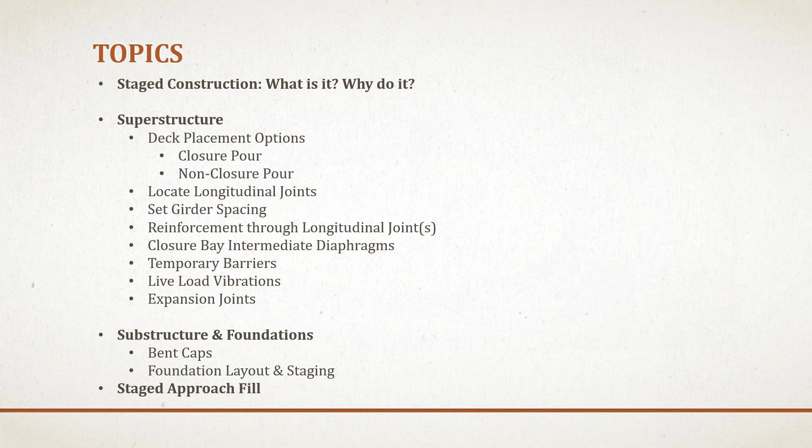Great, thank you, Aaron. Okay, so let's define stage construction first. The full width of the bridge will be constructed in stages or phases. There will be a portion of it that has traffic on it while the other portion is being built. And then ultimately these two come together to form the whole and the finished product.

The stage construction gets utilized in basically three different conditions. The most predominant conditions are when you're replacing a bridge that's already in service, when you're widening a bridge that's in service, and then occasionally you've got a special condition where it's beneficial to do stage construction in a new location. Aaron will touch on that a little bit more as a special topic, in addition to just right-of-way and easement and utility concerns that can also get in the way.

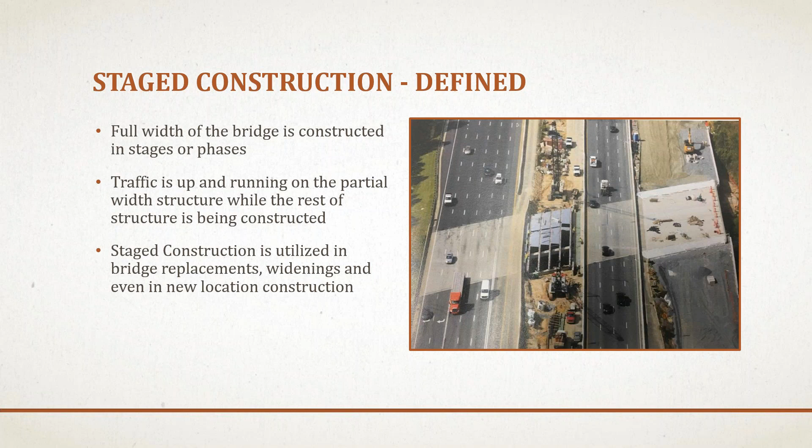All right, so why would you want to use stage construction when you're looking at a bridge replacement? You've already got active traffic in the area where you're needing to do the bridge replacement, and so it may not be practical or feasible to just take people completely off of the bridge that's there, to temporarily or permanently realign the roadway, or just do a total off-site detour. There's impacts with that. You've got to consider maybe having to buy some right-of-way, environmental problems, increase in cost from temporary bridges and approach roadway that comes into it. And some roads, you just can't shut them down. They're too busy. The traffic volumes are too high. There's just no way you could effectively maintain reasonable traffic conditions and shut down that road.

For example, interstates, bridges, roads that are on the national highway system, regional tier classification routes. And sometimes there'll be maybe just a smaller structure that needs to be replaced. You have to do something in a stage constructed way because you don't want to completely cut people off. You can't impact access to schools and hospitals or give somebody an unreasonably long detour. So these are things that are very important to the DOT, and we always take that into consideration early in the planning process for deciding how bridges are going to be replaced.

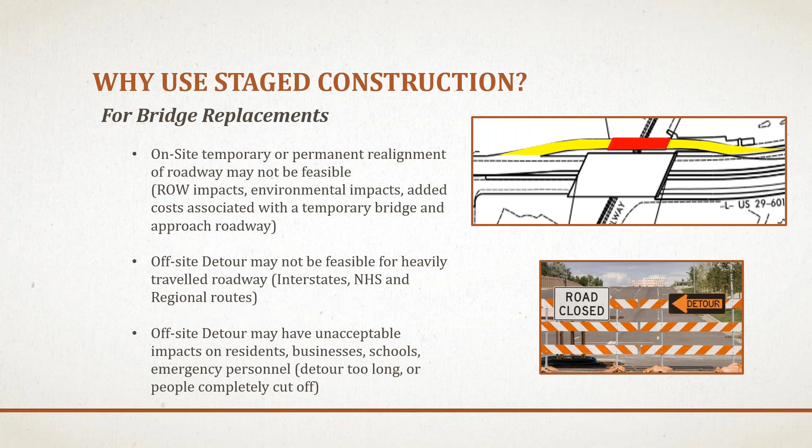Widenings are great in that you're most often able to maintain traffic on the bridge while you remove a small portion of it and then continue to build onto it. So you can typically avoid any kind of detour conditions with a widening. So those bridge replacements and bridge widenings would be reasons for using stage construction.

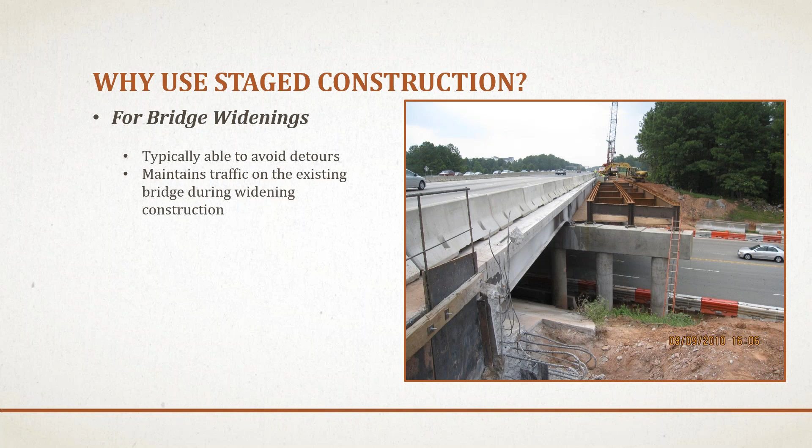Another case I wanted to talk about briefly wouldn't fit into the criteria Josh just covered, where we're trying to either detour or maintain traffic on site. This could potentially be on a new location, say like a Raleigh or Charlotte outer loop, where we don't even have any traffic. But when we have very wide structures, and by very wide I would define that as anything over 120 feet along the skew of the bridge, that can create problems. And the 120-foot dimension is derived from the maximum width that a typical bidwell screed can span without significant truss modifications.

So once we get over 120 foot, we need to be looking at other alternatives. That could be stage construction, where we basically build half, then build the other side, and then close the middle with the closure pour.

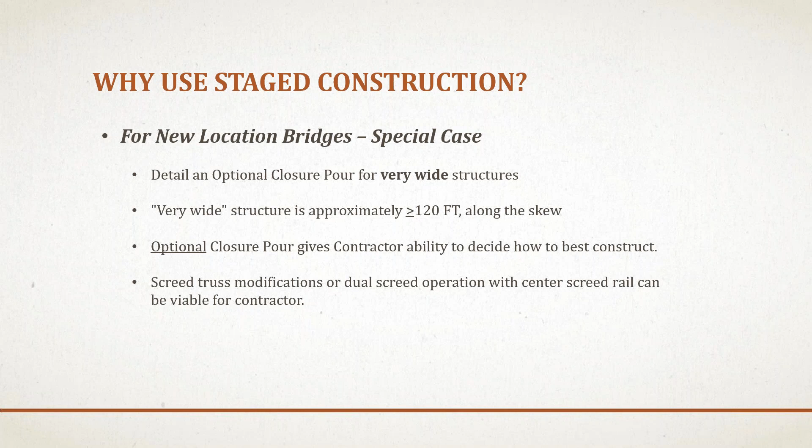So that's one option. But I've had a couple bridges where the contractor has actually utilized two screeds with a screed rail down the middle. So they've got their typical screed rails on the outside, and then they put a third screed rail down the middle. You can see the two trusses, the screeds that are staggered slightly, and they basically poured the bridge using those two screeds at the same time.

They utilized two separate pumps, so it was almost like two separate concrete pours going on at once. By doing this, they did not have to stage construct. So that was a good innovative way to expedite the project and avoid having the stage construction.

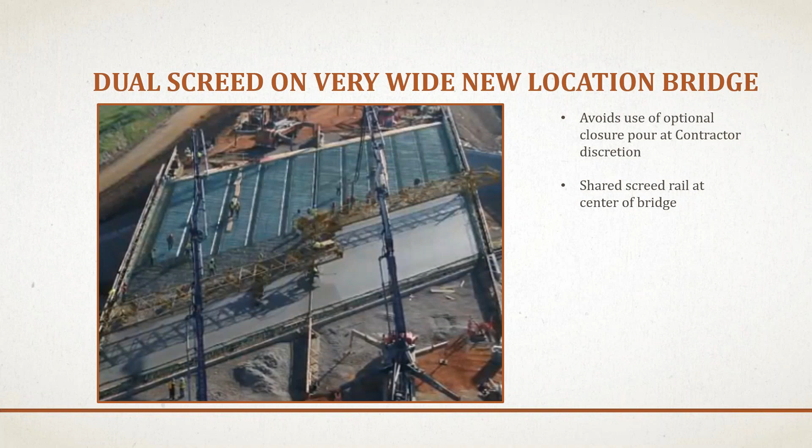The first time I dealt with this, the contractor just proposed it. The second time I knew it to be done, so during design, we decided to show a closure pour on the plans and stage construction, but give the option of the contractor to do it. That way they had the option to do it in two stages or do something similar to what this contractor did. This was a very successful pour. I think they poured about 750 cubic yards of concrete in that one pour. So it was pretty innovative and worked well to avoid stage construction.

Okay, so now with that groundwork on what it is and why we would do it, let's take a look at some of the details of the implementation as far as the superstructure is concerned. I'm going to switch my mouse mode here to show a laser pointer.

Okay, so we're going to be defining a closure pour on this slide, and here in the upper left-hand corner is an existing two-lane bridge, and on the bottom shows the full width of the future structure, the one that we're going to be constructing. So we're going from 2 lanes to about 5. Obviously there's a lot of traffic here to justify that large of a structure, and that explains, in part, why we would need to do stage construction here.

So you start out by building one half of the bridge, designated stage 1, while traffic is maintained on the existing structure. Once this was completed and has a portable concrete barrier rail erected here to make that a safe edge for both the public and for the people working on the other side of it, you move your traffic over into that portion of the bridge. Then you come and build the remainder of the new structure.

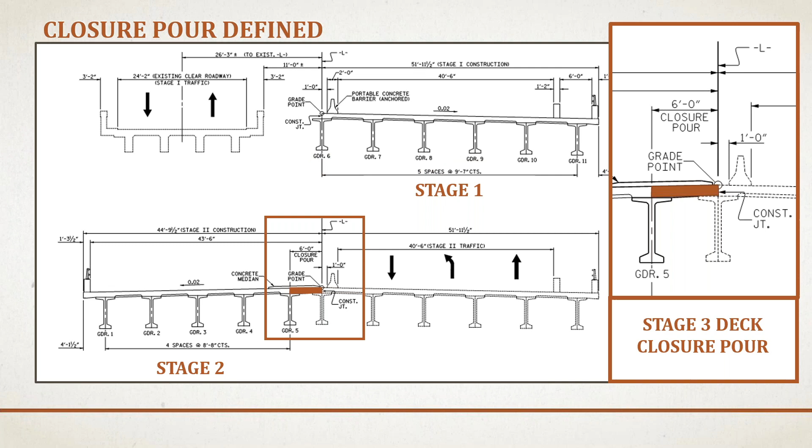And then what we're really honing in on here in this presentation is what are we doing when it comes time to connect those two with the stage 3 deck closure pour right in this area. So that is where you build one half, move traffic to it, build the other half, then connect the two, and then you're ready to open the bridge to final service. So that's kind of the definition of a closure pour, this little closure area that connects the two structures that have been constructed partially. Then we have an alternative condition.

This is a real creative name here. This is called a non-closure pour, and it's an alternative to using a closure pour. It's applicable under some more constrained conditions, which we'll discuss. But usually that means you have a narrower structure with spans that aren't quite as long that permit this type of construction, where you would come and add directly onto an existing bridge or an existing portion of a newly constructed bridge in order to span it out the rest of the way.

There's criteria that allow you to use this condition. It's an alternative that's open to you, but the closure pour you're always welcome to use. Sometimes a set of plans will have closure pour details, and the contractor will come back and say, I think I could do this with a non-closure pour approach, and it would be beneficial for them. So we'll review that and make any modifications that are needed to facilitate that.

In a case like this where you're using this on a widening, which is kind of a typical condition where this would occur, is what we're showing in this diagram. You would often use a latex modified concrete overlay to help improve the rideability as you go across this joint that gets created.

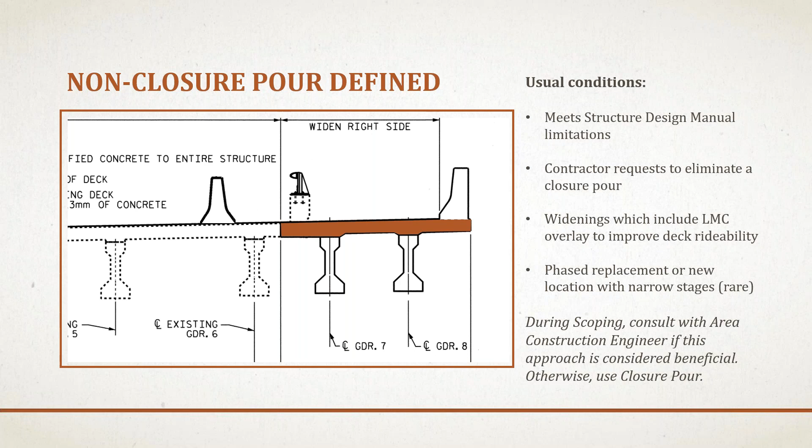Okay, so a couple more minutes for me here. The method of making a selection on the closure pour or the non-closure pour.

The non-closure pour is limited, and you cannot use it on steel structures at all, just due to their inherent increased flexibility. And then with pre-stressed concrete girder superstructures, there's some limitations on the span length. All spans in the bridge have to be less than 85 feet, and all spans have a non-composite deflection limit of 1/2 inch. If you meet those criteria, then this is a candidate approach that you would want to consult with the area construction engineer to see if they feel that would be beneficial for this particular bridge design. Otherwise, you use a closure pour.

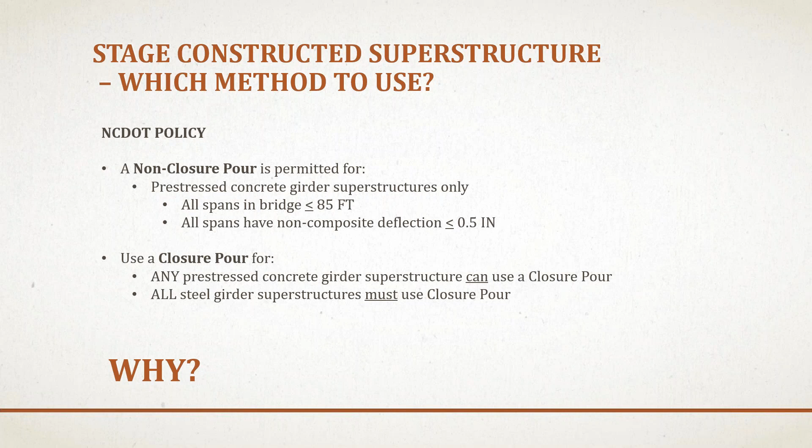And so the question is, well, what's the difference between those two? What are some driving concerns behind the deflection and the span limits? It has to do with both deflections and the time that it takes in order to get concrete cast.

This diagram is showing the incremental increase in dead load deflection as the concrete pour progresses from back station bearing to the head station bearing on a presumed simple span structure here. When you've got 1/4 of the span placed at the quarter point of that span, you will see 17% of the deflection that will ultimately occur when the span is completely poured. Following that through, when the span's halfway poured, you get to 54%. 3/4 poured, you're at 87%. And when you're finally done with the pour is when every point in the bridge has reached its final deflection amount that it's going to be experiencing under the dead load application.

And so the timing of this is an important consideration, and you can also run into a condition that is known as wedging, and I'll let Aaron talk to that one. Put it back on that last slide.

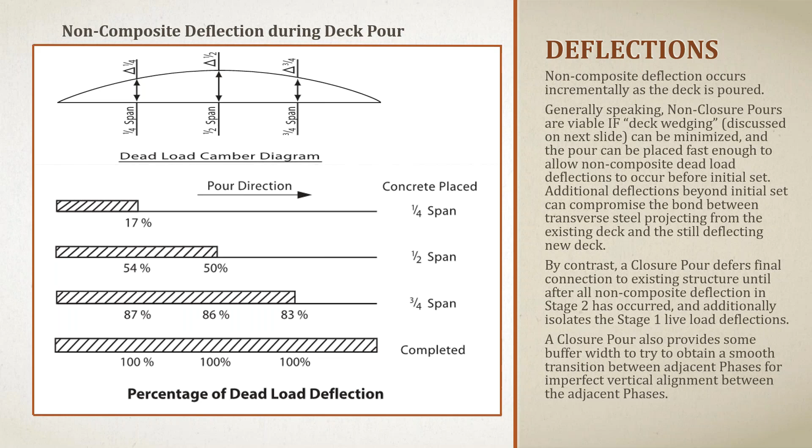If you are in that range of a half inch, or if the contractor proposed to eliminate a closure pour and it slightly exceeded what was in the design manual and it was agreed upon to allow it, a couple things you could do is preload the span to try to get some of that deflection out before we screed it.

Typically, we like to keep the leading edge of the concrete about 5 to 10 feet ahead of our screed. But in this case, preloading it out onto the span, maybe halfway or 3/4 of the span, gets most of that deflection out before you start screeding.

Now there's obviously a risk because you have a whole lot of concrete out there — if the screed breaks down, or something happens, or you get rain, you're left with a whole bunch of concrete that hasn't been finished, and it could be very costly to deal with from a contractor's perspective. But under certain circumstances, if agreed upon by the engineer with the DOT, we have done this.

One thing I like to do if I was going to preload would be to keep the concrete below the top mat of reinforcing steel — there's 2 mats on our decks. Then they can preload and come back and place fresh concrete in front of the screed, vibrate the two to make sure we don't have any cold joints, and continue to go back and forth and advance the screed. That would mitigate some of those effects that I described.

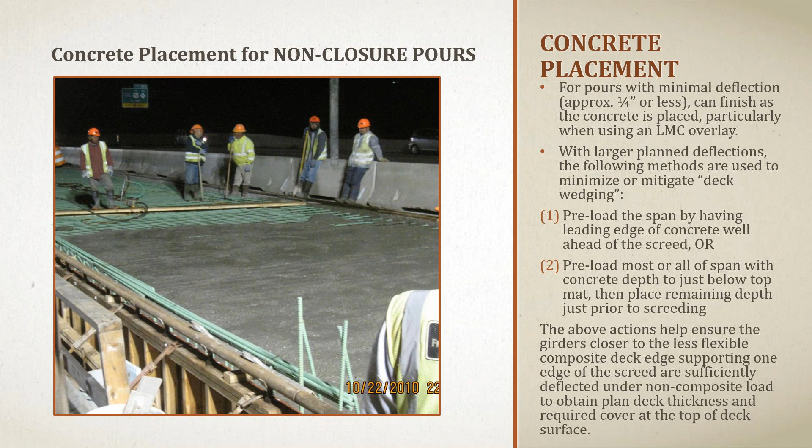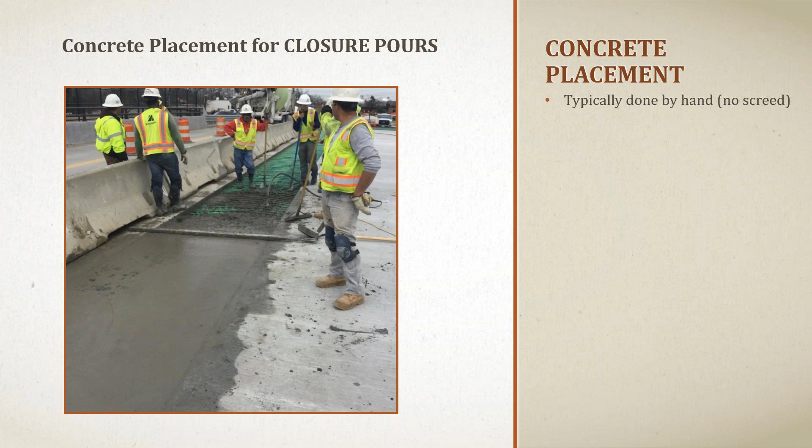It's closing that gap. They can range in width, and typically it's small enough that the contractor will just use some form of a straight edge to finish that concrete. If it gets too small of a closure pour, you can have issues with your left or right side possibly not matching up as well, resulting in a more severe slope between. If it gets too far, the finish in between the two might not be as good. So these are considerations to think about when deciding how wide that closure pour is going to be.

But the point I want to make is that when you design the stages of construction based on that pour sequence, when you come to pour the closure pour, your deflection has already happened in your deck. If there's any deflection at all, it's very minimal when pouring the closure pour, so it does not have to be divided up with transverse construction joints. I've seen plans that divided up closure pours to match those transverse joints, but that is not required because of the lack of deflection.

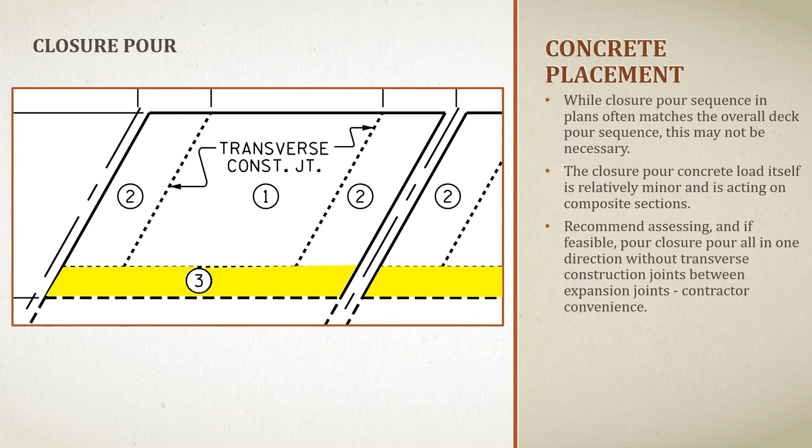I'm going to get a little bit into deck forming, particularly in the closure pour region. If there's one thing I learned while putting this presentation together, it's that there are lots of different ways to do this. Different contractors or engineering firms have different preferences, and based on the situation, have different alternatives. So there's no one-size-fits-all method. I'll just go through a few of these.

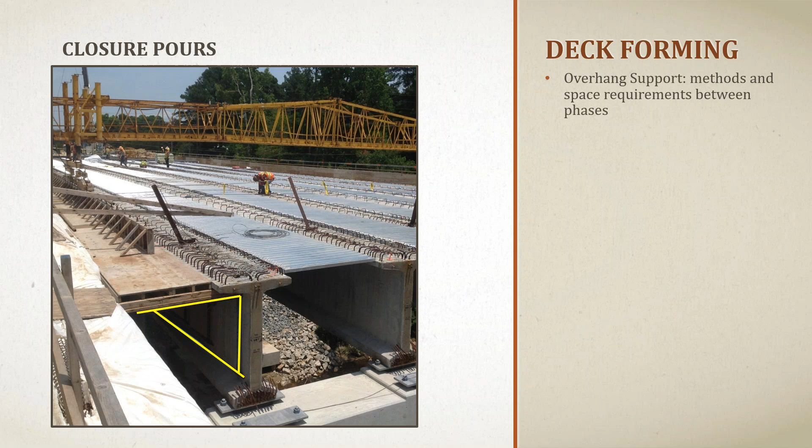The important thing, and I mentioned it before, is that whenever you pour that second stage, it has to act completely independent of stage 1. We don't want anything tied together that would limit the deflection when they go to pour stage 2 - we want it to deflect like it was designed to.

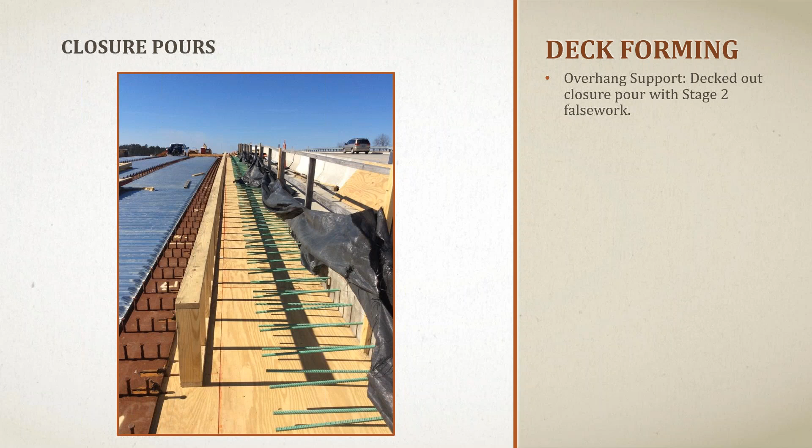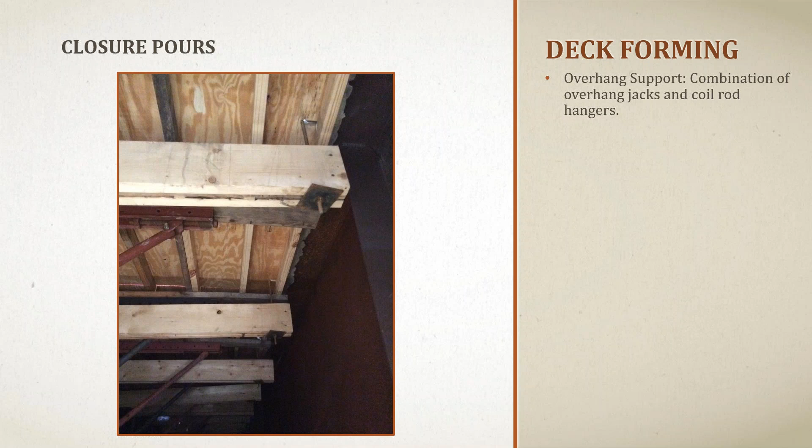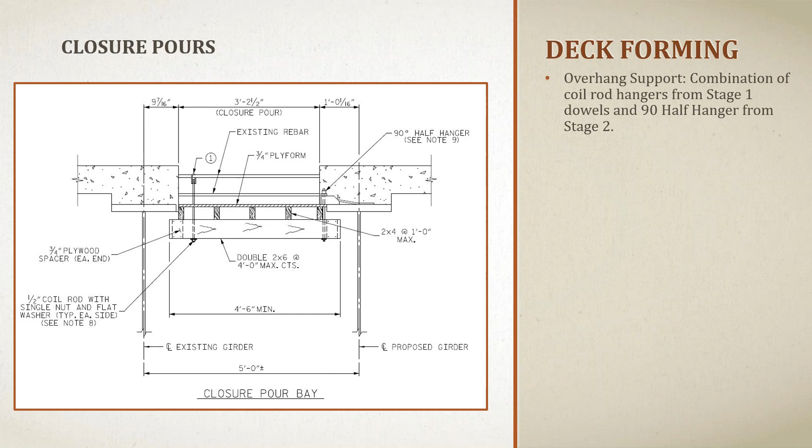Here's another diagram where they did not use overhang jacks. On the left side is stage 1, and you can see they've got a coil rod and hanger coming off of the reinforcing steel from stage 1. Then on the right, when doing stage 2, they've got that 90-degree half hanger supporting the false work to floor in that closure pour. As they pour stage 2, it can rotate and pivot and deflect, and once they finish, they can pour their closure pour.

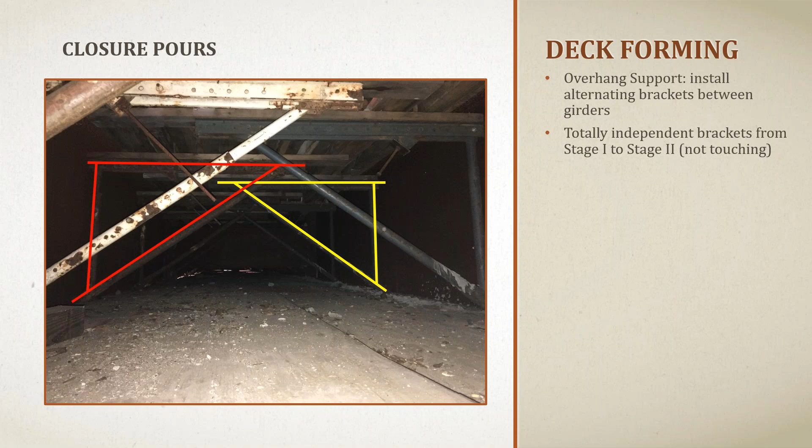This particular contractor chose to use all overhang jacks. Although it's hard to really see what's going on, they poured stage 1, used the overhang jacks to support their false work, then set the girders on stage 2, put new overhang jacks on that side, overlapped them, and floored in over top of them. So they were able to act independently of each other, but that's the methodology they chose in this case.

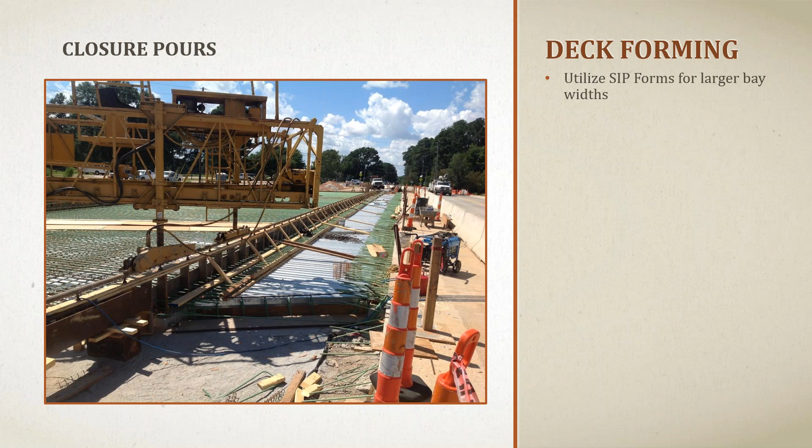As a designer, you'd have to recognize that if you're calling for that construction joint to be over top of the girder, you have to modify the stirrups coming out of the top of the girder, which is standard and it's not a problem. You just have to recognize that so they don't cast the girder with the connected stirrup.

I'm going to let Josh talk a little bit about longitudinal joint placements. So for longitudinal joints, there are some best practices in play, recommendations that we observe depending on the structure type. For pre-stressed girders, you will typically locate your longitudinal joint just off of the edge of the flange.

We're discussing here a way that you can put it right down the middle, and that's acceptable too. But usually you want to have it at least 3 inches offset from the edge of the flange in order to accommodate room for the hardware that the contractor will utilize to create the forming that's needed.

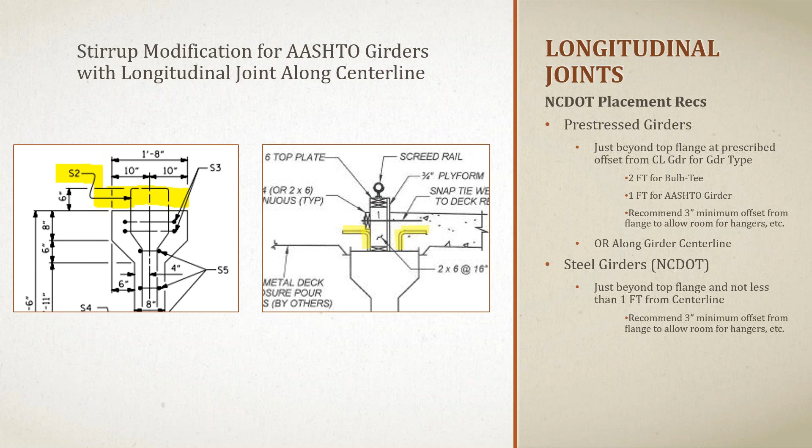Okay, so some additional placement recommendations for longitudinal joints. You try to place them where they're not going to be getting beat by traffic. Put them in a shoulder if possible, below a median if possible.

Additionally, you want to place them on a crown point, where bridge decks are super elevated for drainage purposes and for horizontally curved structures. The super elevation is also a very important safety consideration for handling curves.

But you want to either put your crown point on that joint, or have your joint at least 4 feet away from the crown point, again, for good implementation of the screed operations in the field.

And the reason that 4 feet is that we need 4 feet or more when we're screeding a bridge. The screed can only come within a couple feet of the side form, and from that point to the outside, you've got somebody hand finishing that area.

And so if hand finishers have a tough enough time just projecting that 2 foot straight based on the super elevation, if we asked somebody trying to hand finish a crown break and get that consistent, it would not go well. We would not get good results.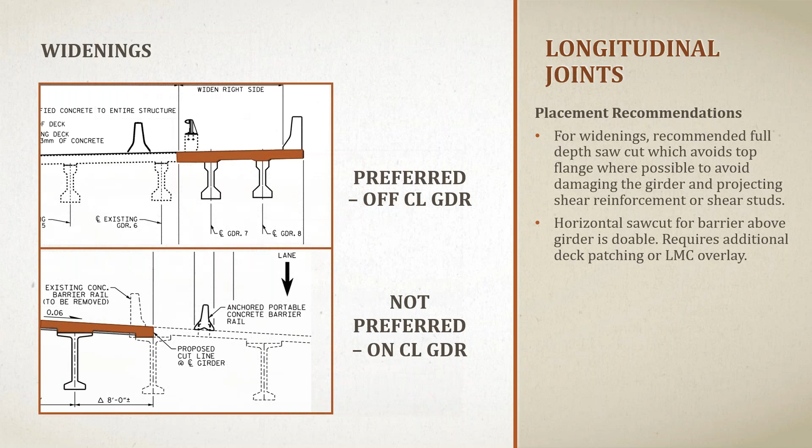Longitudinal joints are not perfect, and that's partly why there are so many considerations as to where they can go and what's ideal, because they'll leak. If the openings at this joint are greater than 0.007 inches, they're not going to function as though they're sealed against water or chloride penetration.

The way you can tell you've got a problem is you can get down below the bridge and look up to see if there's any formation of material leaking through the bottom of that joint. Sometimes you'll see rust stains even when using epoxy-coated reinforcement, because it will rust over time.

The Virginia Transportation Research Council made recommendations to move your longitudinal joints over the tops of the girders, use corrosion-resistant steel, or use expansive concrete in the closure pour to try to keep those interfaces sealed, where they tend to creep apart from one another due to differential shrinkage between concrete cast at different times.

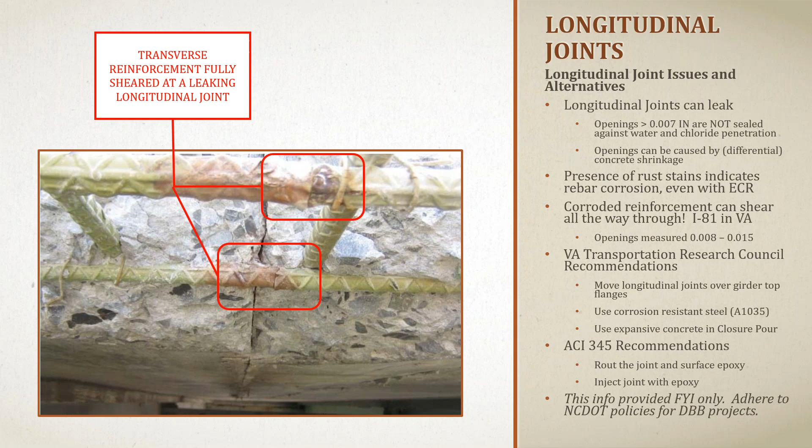Moving on to girder spacing, inside the Department of Structural Design manual, they have recommended spacing as a function of the girder type. If you conform with these spacing limitations for a closure pour, that has some cost savings later on in terms of the diaphragm operations that accompany it.

But it's also a flexible element, and if you're involved in the layout of the structure and considering using the closure pour, you can take a look at using a wider space if it will end up saving you a girder line, because that also provides some good economic benefit.

The department recommends using a 4 or 5 foot spacing when you're doing a widening as well. As a department, we are looking at evaluating these widths and working with our Associated General Contractor Committee to see about possibly modifying these recommended widths, particularly on the modified bulb T girders, because it is very tight between them due to their large top flange. Hopefully we'll have some updates on that soon.

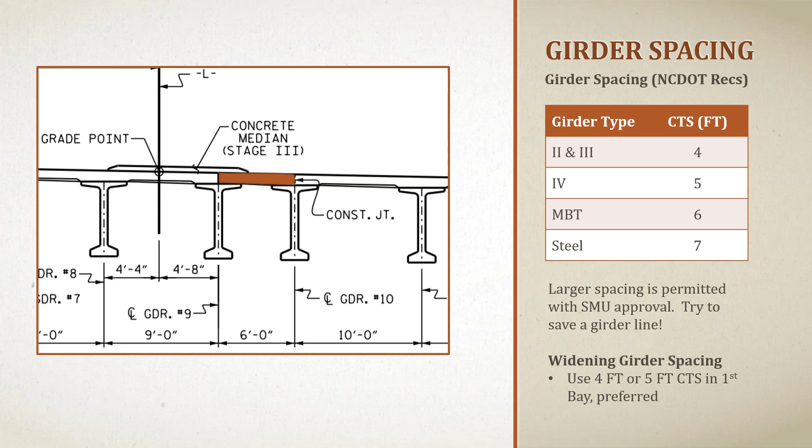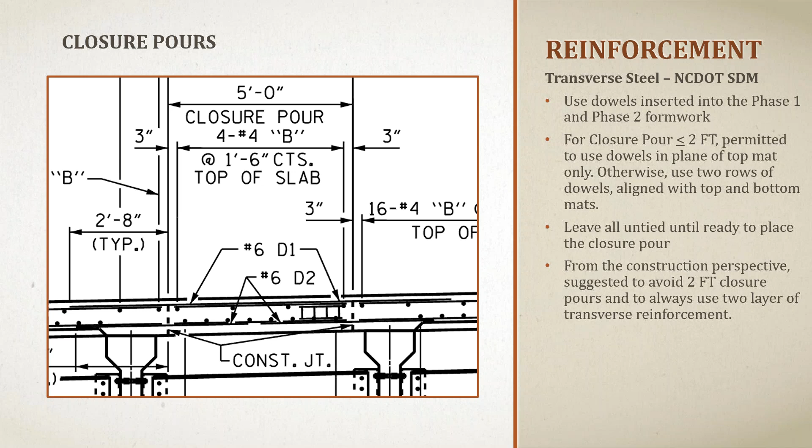The design manual allows when you have a 2 foot or less closure pour to only have 1 mat of steel in the top. So there's 2 things I want to speak on. The 2 foot closure pour, although allowed, if your stage 1 and stage 2 don't deflect exactly the same, even if it's a quarter inch or half inch off, over a 2 foot closure that can be a pretty extreme change in super elevation just trying to match, or it can take extensive corrective action on one of the stages to get a better tie. And most of these closure pours will be in the final traffic pattern.

You'll have vehicles traveling over them, even though we make efforts to keep them out of the travel lanes and put them in the shoulder, but a lot of them are in the travel lane. So the better we can make that transition is obviously preferred. In my experience, the 2 foot closure pour does not give you as much opportunity to have a less severe difference between left and right stages, or stage 1 and stage 2.

Additionally, my preference, and I felt this way even before I saw the picture of the bridge in Virginia, is that having 2 layers of steel is just an extra layer of safety factor. So I always recommend having 2 layers, and if we can, increasing that closure pour.

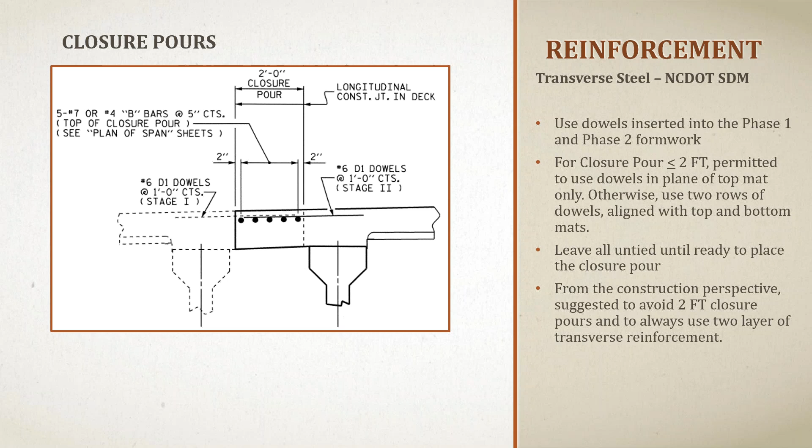So the contractor needs to use good means and methods for removing that deck. Saw cutting, we have to deal with what's out there. If the deck's in bad shape underneath, then we'll have to chip it out and patch that back.

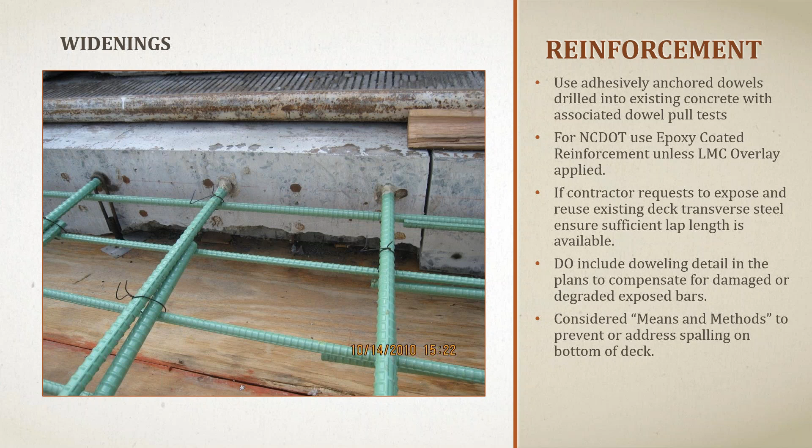Sometimes a contractor will ask, instead of saw cutting all the way through, to saw cut just the top couple inches and then chip out the rest, maintaining the existing reinforcing steel to splice on for the widening. We have done that before, but part of the problem is that chipping out the concrete instead of saw cutting it causes more spalls like this on the bottom. That's a consideration the department has to take into account in approving it or not. But typically we prefer to saw cut all the way through and then drill and epoxy in new dowel bars.

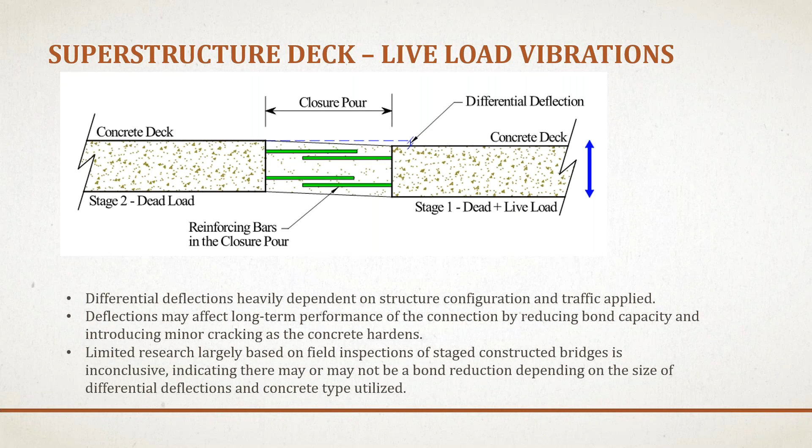As the traffic moves along on stage 1, it's going to have instantaneous deflections as the traffic moves through, while on the other side the deck is being cast and deflecting, eventually setting into its final deflected position under dead load. But you've got this movement occurring on the right side, and that can create issues with bond and connection quality in the closure pour. So here are some quick recommendations on this.

There was a study done by FHWA that took a look at the magnitudes of deflections that would typically be encountered during stage construction. They looked at 0.005 inches, 0.01 inches, and 0.05 inches of deflection.

They looked at different types of concrete, including Class AA concrete typical of what's used here in North Carolina for deck construction. The basic observation was that bond is reduced when the rebar moves on the order of a 1/16 of an inch, with significant bond reduction seen at 0.05 inch deflection. But down at the 0.01 inch deflection range, there's basically no observable effect. It was also noted that the frequency of deflections doesn't really have an effect on the bond - it's just the magnitude.

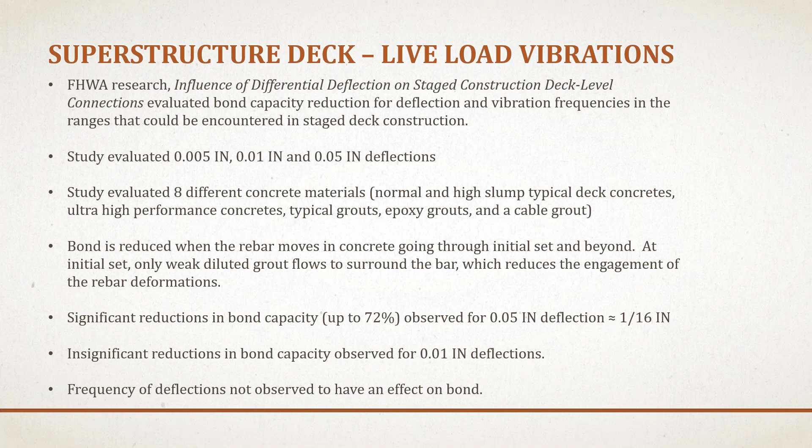So some recommendations that can be brought into the design side to help improve this condition is to just try and get the bridge smoothed out. Sometimes there's an opportunity to do corrective action on the front end of a project to smooth the structure approach so it's not a big hit when the vehicle comes on, causing a bouncing effect just because the bridge itself is in bad shape.

I believe Aaron, you mentioned you guys did something like that for a project in Division 6. Yeah, having a smooth approach onto the bridge where traffic's running - the smoother the ride, the less impact there's going to be. A lot of times during the life of a project, we may not have the final lift of asphalt approaching the bridge, and if you just have a short little wedge to get up onto the bridge, that's going to create that bouncing action.

So one consideration would be, and we did this in Division 6, the Fayetteville area, was to come back about 50 feet off the bridge and pave the final surface of asphalt so that any bouncing action is hopefully minimized once they're on the bridge. That can either be milled out and replaced later, or potentially just used as the final surface. But anything you can do to minimize that bouncing coming onto the bridge.

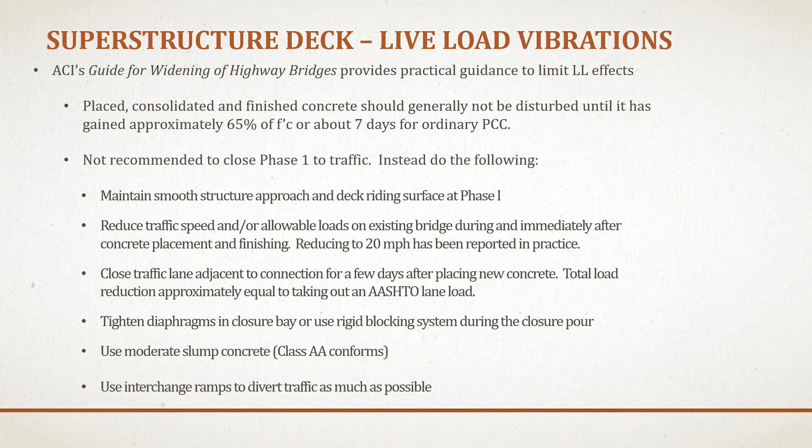All right, so moving on, we'll talk a little bit about diaphragms, but we are running well ahead on time here. I think we've got about 15 minutes to wrap it up.

As far as our diaphragms, with steel girders in the closure pours, we're always going to require diaphragms. But we want the two stages to act independently of each other, the left and right stages. So we'll typically have a slotted diaphragm with slotted holes such that they can be connected but not tightened, and as stage 2 deflects, that diaphragm isn't restricting that deflection - the bolts will be able to slide in that slot.

For pre-stressed concrete girders, under certain considerations we do allow eliminating diaphragms in the closure pour bay. If you stay within the guided widths we covered several slides back for closure bay widths on concrete girders, we do allow those intermediate diaphragms to not be used, which can save some cost and effort on the contractor.

So that's an option to think of. But if you start exceeding those recommended widths, or if we have steel girders, then the diaphragms will be required and they'll need to be slotted.

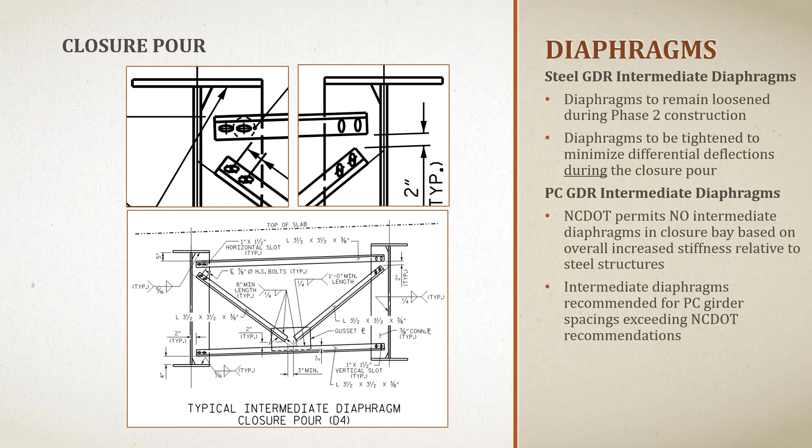For the pre-stressed girders, we're going to use them. If we have 1 or 2 girders on our widening, we're going to use them in the closure pour bay. If you get over 2, if you have 3 or more girders, then they can potentially be eliminated in that closure pour bay, because the overall stiffness of that span would be increased.

But again, leaving them loose during the pour, and then after that's poured and they're both equal on their deflections, and you do the closure pour, then that's when we tighten everything up and connect it.

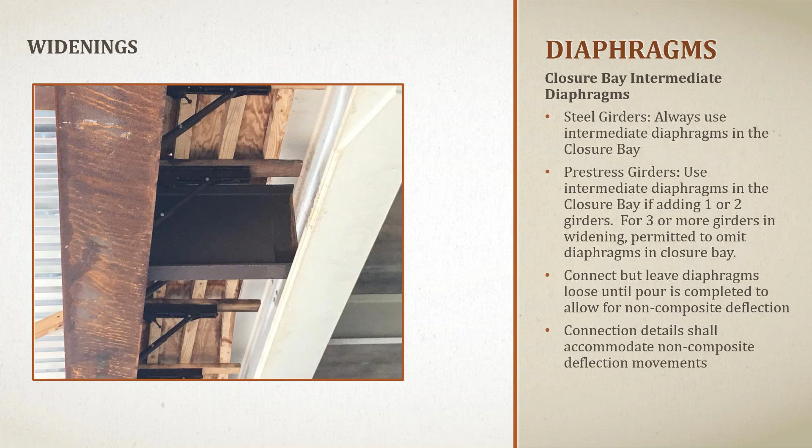So we've kind of talked about traffic. Obviously, when we're widening a structure, we have to protect traffic and the workers. So we're going to use some portable temporary barrier wall. Our policy, NCDOT policy, is that anything 6 feet or more from the edge does not have to be anchored. But if it's less than 6 feet, it will have to be anchored to the deck because of the deflections of the barrier. So that's policy.

But we also have to consider where that barrier wall is placed in relation to the cut line for our widening, because we have to have room to actually saw cut behind that barrier wall. So looking at least 2.5 feet, if we can get more, would be preferred.

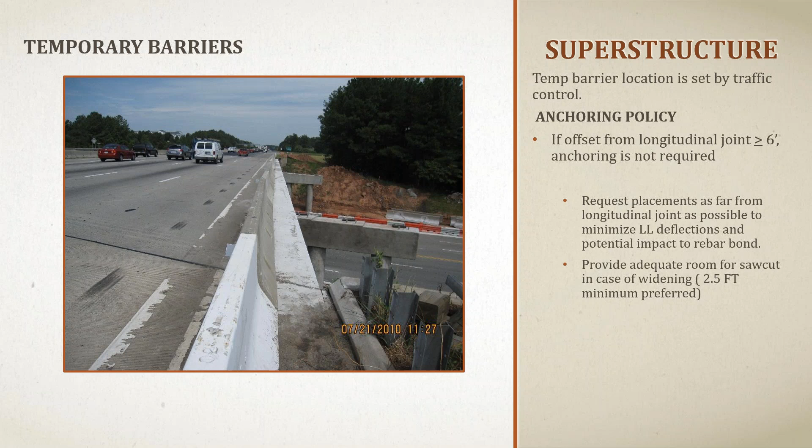And obviously this is going to have to be something that's coordinated closely with the traffic control designers, whoever's coming up with the phasing and lane shifts, to decide where that barrier wall can be placed. But that's one consideration we need to make as structure designers and construction to make sure we have enough room for that saw cut.

So one of our most difficult maintenance items on a bridge is expansion joints, because when they leak, water gets down to our bearings and our girders, and it's just a maintenance nightmare. So we want to make sure our bridges are watertight.

So we have different types of joint seals on our bridges. We use a lot of foam joint seals on certain types of structures, and they're fairly easy to phase. All you have to do is heat weld the two together, and it can be spliced. And so if you have stages, you can just keep adding on and welding to it.

So that can create difficulty when you're building a bridge in stages. And so we used to not consider this until we started trying to build them with stage construction and found out that it does create these problems.

And so we have been trying to emphasize the placement of the hold down plates, because they come in shorter pieces to make them more easily installed, because they can get heavy trying to place them in and bolt them.

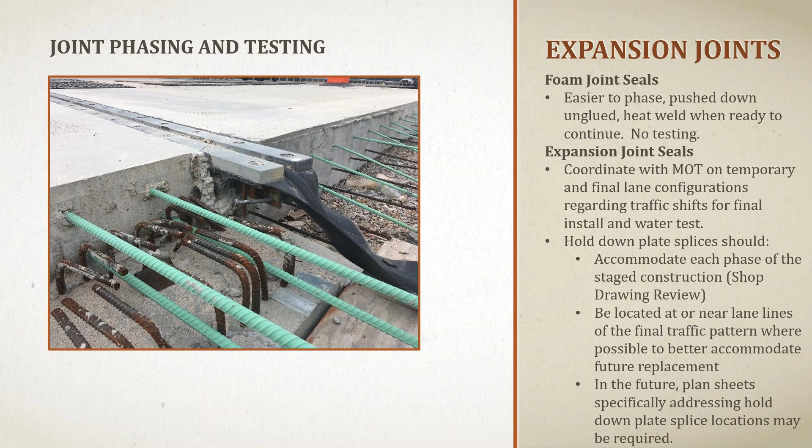So again, if you are a designer that works with these expansion joint seals on a phase job, that's definitely something to coordinate on early. And then we're looking at possibly coming in and placing a new seal all the way across at the end with a temporary seal or no seal at all during the life of the project.

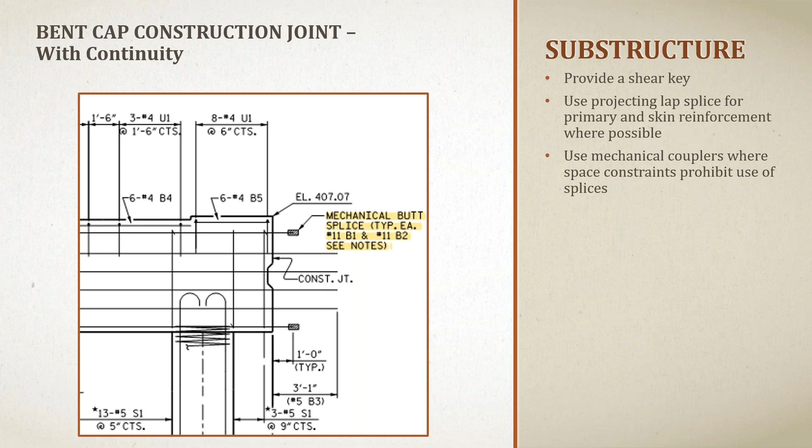Sometimes you have a condition where you don't have continuity. In an interior bent, maybe just two independent structures side by side, and in an end bent, you can have effectively no continuity if you happen to have no load being applied between the adjacent piles. In which case, it's not really necessary to continue your flexural steel across the span between the pile that's already in the ground and the one that's part of the next phase.

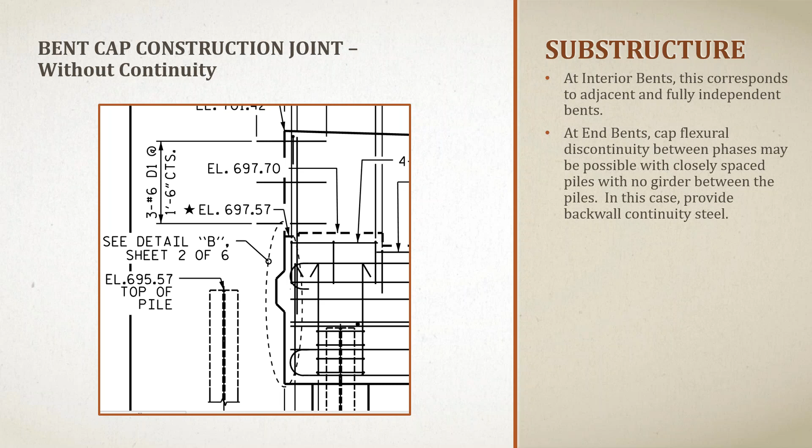Here's - Aaron's going to take this one.

Yeah, sure. So this particular subject, as far as where we locate our new bents and piles compared to where the existing is - this could apply even if you're not doing stage construction - we want to consider what our existing foundations are going to be.

So in this case, you can see the abutment and then the spread footing at the bottom. They're locating the new steel piles such that, if there were no other considerations, you could potentially have conflict with that existing spread footing. So in stage construction, we might be dealing with that more because we might have to maintain part of the existing structure while we build a new one.

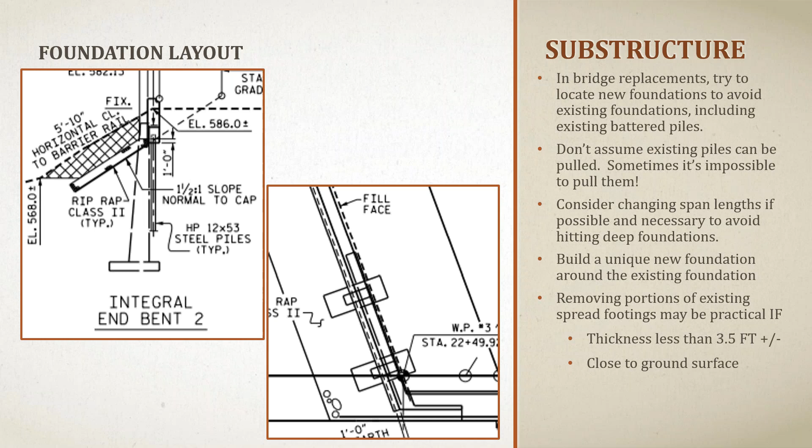So in all cases, we need to consider where that is. It would make more sense to try to go maybe 5 or 6 more feet so that we're not having to deal with that conflict. In this particular case, they knew where at least the as-built plans from the existing bridge showed those footings, and on this next slide, they modified the spacing of the H piles to avoid those.

But again, it's still a risk when doing something like this, so we need to try to consider where that foundation is, try to get a little further away if we can, and also don't assume that we can pull the existing piles. Sometimes they can't be pulled if that's what's in conflict. If a footing is not buried very deep, it could potentially be excavated and removed, but in that last picture, you're not going to dig down that deep to remove that spread footing.

So those are the types of things that need to be considered when you're dealing with existing structures. And just deal with it early - go ahead and be coordinating on the front end with all of the involved disciplines so that you lay out the bridge in a way that's beneficial for everybody.

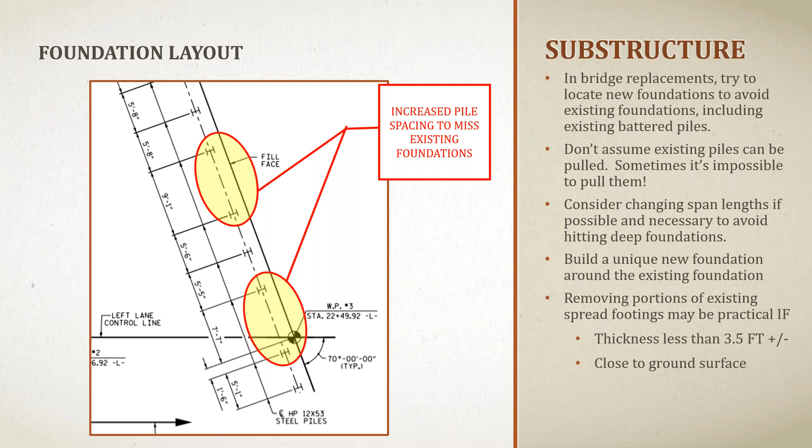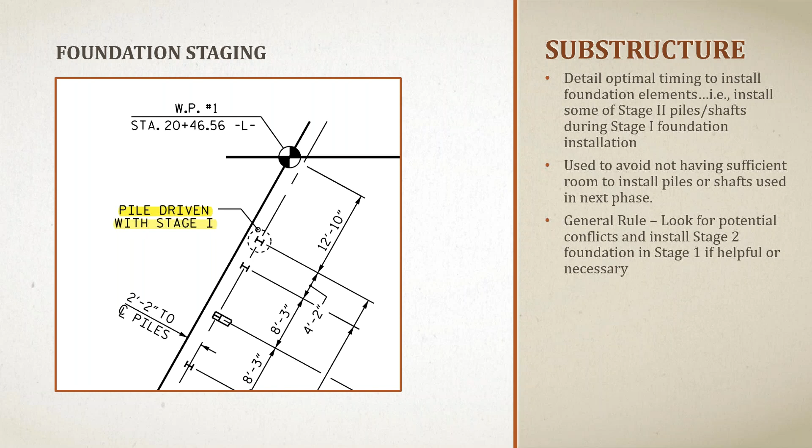And if it can be driven in stage 1, even though it's not needed, basically note right on there that it should be driven with stage 1. So anytime we can do that, we need to try to do it.

Sometimes you'll have a case where you're using an existing bridge, continuing to use it while a new structure is going in, but you have to take a portion of the existing bridge away in order to fit in the new structure as part of a stage construction, or even just new construction without staging. Sometimes that applies too. From the design engineer's perspective, we recognize when we're going to need some kind of supplemental temporary works, and we'll indicate that in the plans. But unless you're on a design build project, you're typically just indicating you'll have this need, and the contractor's engineer will deal with it.

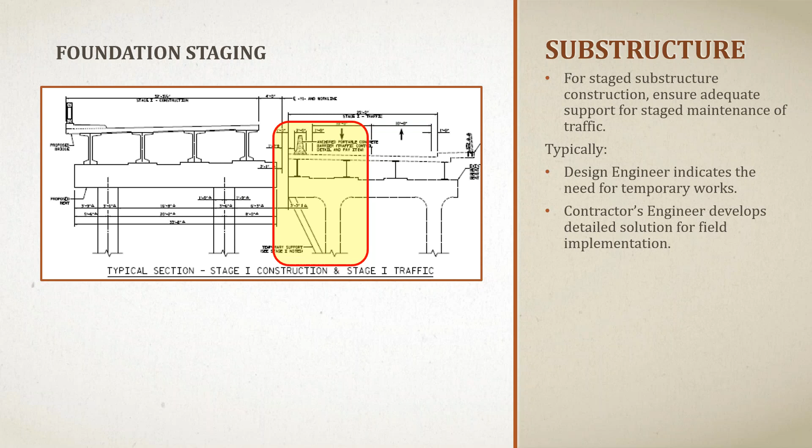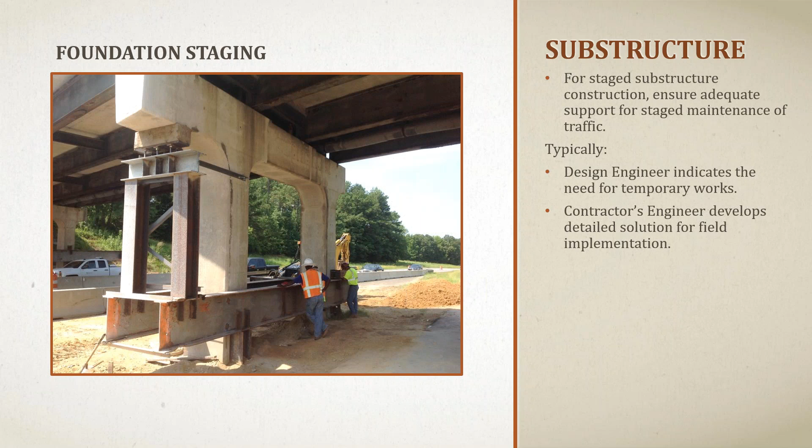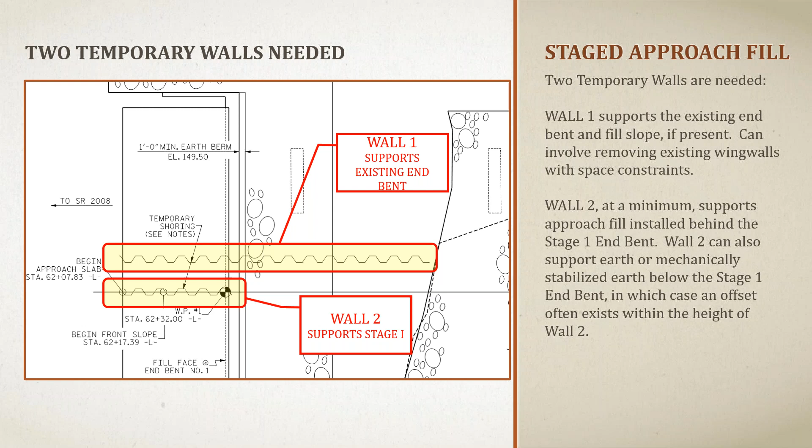So what you're doing is putting some kind of shoring. It might be sheet piles, it might be a soil nail wall, to support the existing bridge when you cut down beside it. Once you do that, you build your first stage, and as you build that, you've got to build it back up. So you have to have a second line of shoring to support your stage 1 roadway. Once traffic's switched to that, the first wall can be removed, and then the next stage of the structure is built. This next picture will let you visualize it a little bit better.

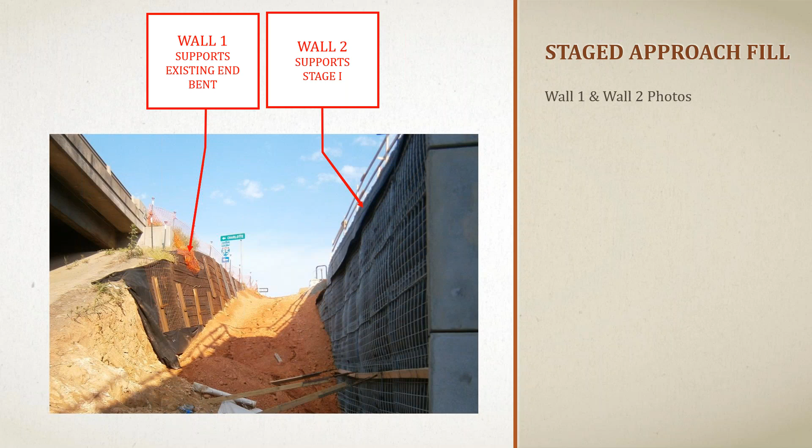So on the left, we've shored up because we had to excavate down beside the existing bridge to give us room. On the right side, we have built our new approach to the bridge with a temporary retaining wall. Once traffic is shifted to that, everything on the left side will be removed and excavated, and we'll build right up to that temporary retaining wall.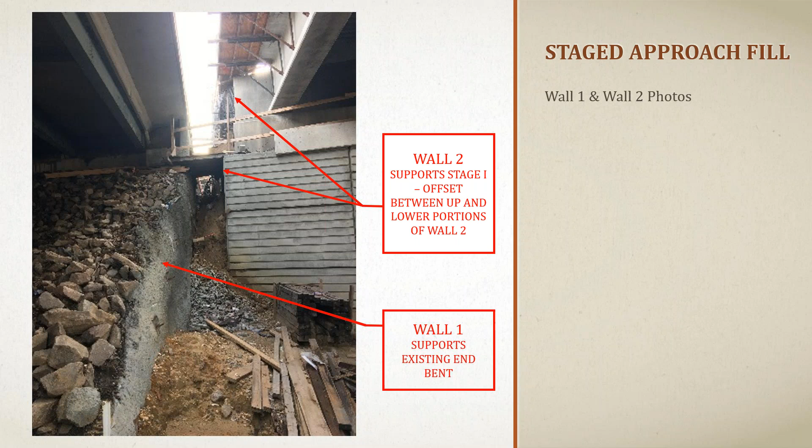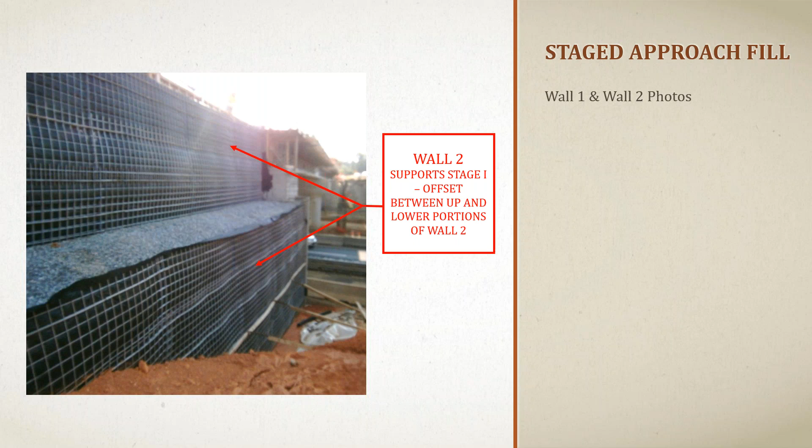In that last picture, you had a lot of room. This picture is probably more typical of what you'll see. You've only got a couple feet in between the two lines of shoring, but it's basically the same concept. Wall one supports the existing, then we build the permanent, and then shore up that side joint with some type of temporary shoring. This is looking at it from the other angle, so that will be used as temporary shoring, but will just be backfilled against and remain in place as sacrificial when they go to build the next stage. That gives you a perspective of what it looks like.

Okay, so those are all the topics we covered here, and we wanted to open the floor up to see if anyone had any questions.